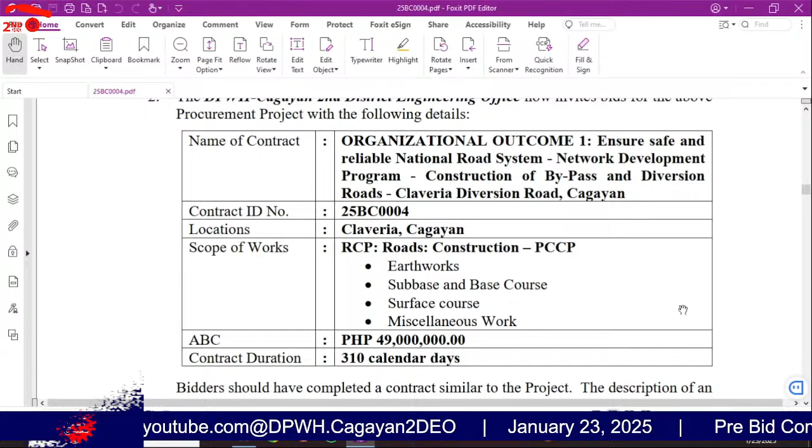So with this, may I request Engineer Figueres to discuss the details of this project. For the contract ID 25BC0004, contract name: Organizational Outcome 1, ensure safe and reliable national road system, network development program, construction of bypass and diversion roads, Claveria Diversion Road, Cagayan. Location of the contract is Claveria, Cagayan, with the approved budget of the contract at 49 million.

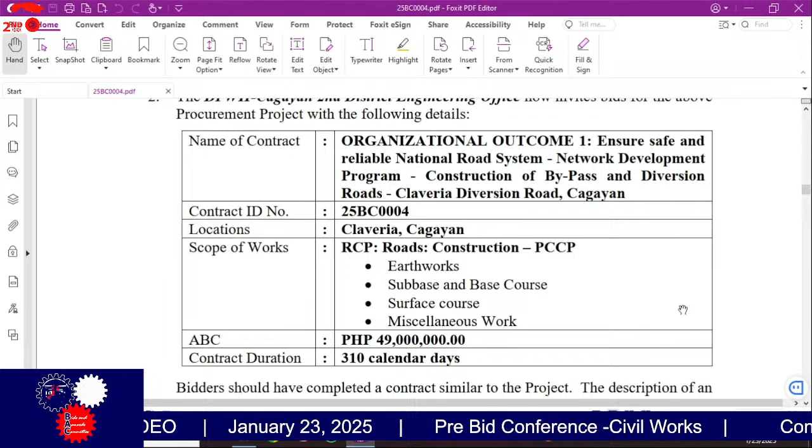For the major categories of work for the contract to be procured, we have RCP road construction, PCCP, with a target length of 3.23 lane kilometer. Contract duration of 310 calendar days.

For the description of work to be done, first is the facilities for the engineers, then other general requirements and earthworks, then sub-base and base course, surface course, and miscellaneous work. We also have the drainage and slope protection structures.

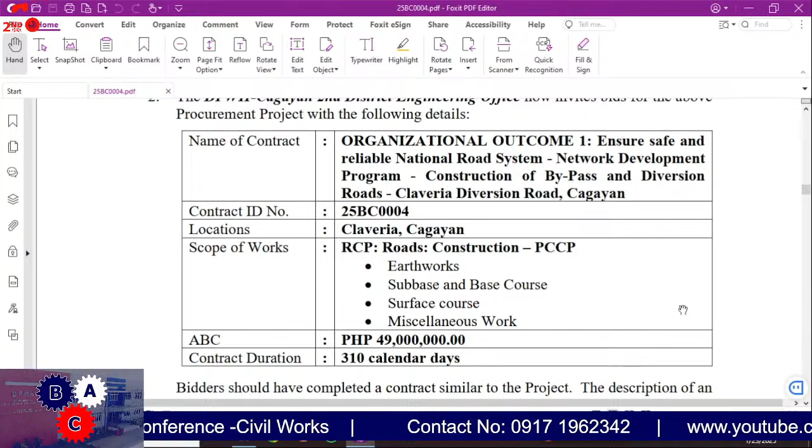For the minimum equipment requirement, we have: one payloader, LX280-2C, 110 HP, with a capacity of 1.5 cubic meter or 1.95 cubic yard; one water truck or pump, 360 horsepower with a capacity of 16,000 liters; one dump truck, 290 horsepower with a capacity of 12 cubic yard; one motorized road grader, G710A, 140 horsepower.

One sealer, one joint sealer, gas or diesel driven with hot or cold spray nozzle; one backhoe, 138 horsepower with a capacity of 0.8 cubic meter or 1.04 cubic yard; one plate compactor, 400 to 500, gasoline engine, 5 horsepower; one vibratory roller, 125 horsepower with a capacity of 10 metric tons; one transit mixer, 175 HP with a capacity of 5 to 6 cubic yard; one concrete vibrator, flexible shaft type, 2-inch head in diameter, with a 5 ampere gasoline-driven unit.

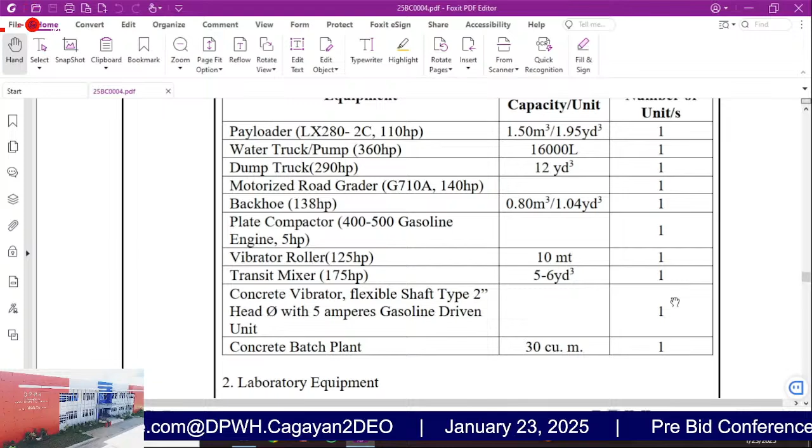One concrete batch plant with a capacity of 30 cubic meter. That's all, Mr. Chair.

Okay, any reaction or correction for this particular project? Okay. So, since there's no correction, may we now proceed to the next project.

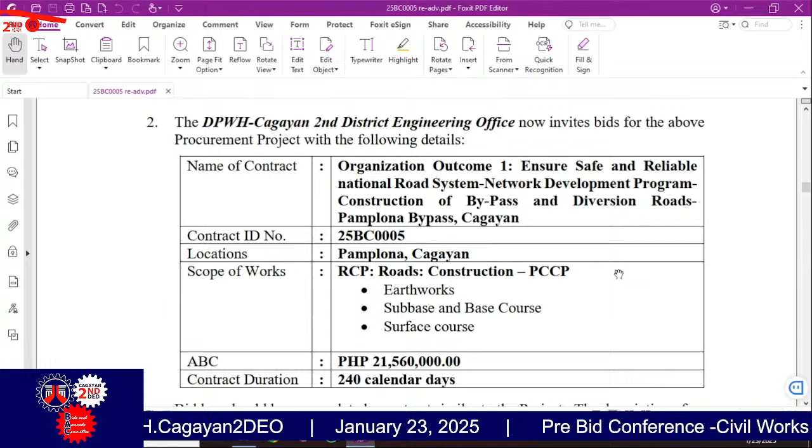The contract duration will be 240 calendar days. And for the scope of work includes earthworks, surface course, and base course, and retaining wall with RCPC.

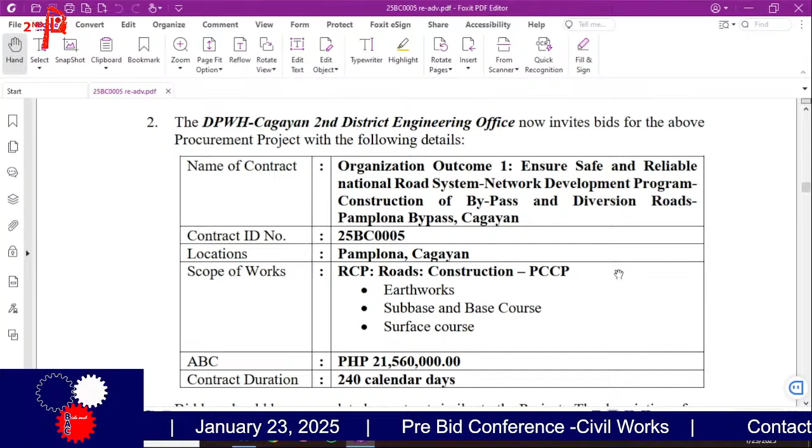The minimum equipment required for this project: 1 unit each of backhoe 138 horsepower, cargo or service truck of 270 horsepower, concrete screeder, concrete vibrator, dump truck, motorized road grader, payloader, transit mixer, vibratory roller, and water truck with pump, sir. That's all, sir.

Okay, by the way, why is it this project was re-advertised? What is the problem? Oh, wala, I don't see a problem here, sir. No, we already advertised this before. Yes, sir. So why re-advertise? What is the cause? Root cause?

Yeah, okay. Well, I thought there is a revision in the program of work or plans like that. So it's okay. So it's only because of the re-advertisement is the eligibility of the contractor.

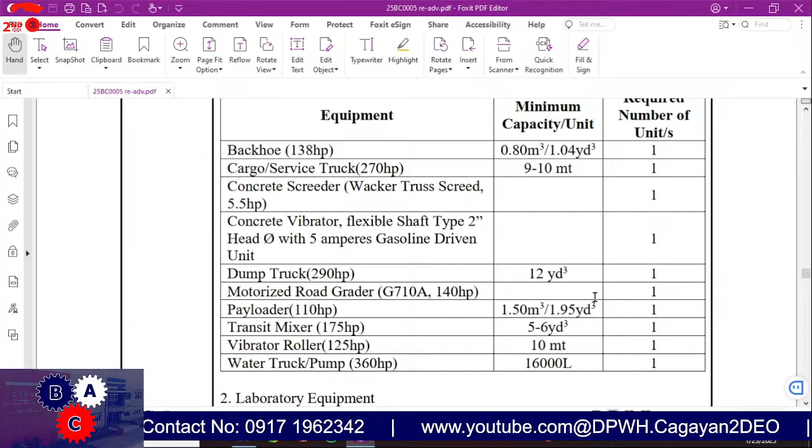Okay, next project, 25BC0009, organizational outcome 2, protect lives and properties against major floods, flood management program, construction and/or rehabilitation of flood mitigation facilities within major river basins and principal rivers, construction of Dugo flood control along Abulug River, Package 2, Barangay Dugo, Abulug, Cagayan.

Okay, Engineer Gulia, would you please read the details? Thank you, Mr. Chair. Good morning to everyone. For this contract, ID 25BC0009, the approved budget for the contract is...

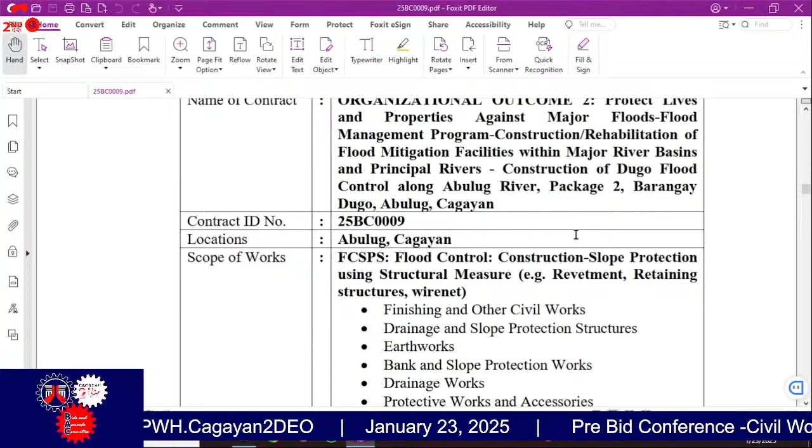96,500,000 pesos only. And the major categories of work for the contract to be procured: FCSPS, flood control, construction, slope protection using structural measures, revetment, retaining structures, wire net. It has a net length of 263 linear meters.

And the similar major categories of work: RCSPS, roads, construction, slope protection using structural measures, revetment, retaining structures, wire net, FHR, flood control, hydraulics, river control, PHC, ports, harbors, causeway, and FHD, flood control hydraulics dam. It has a total contract duration of 241 calendar days.

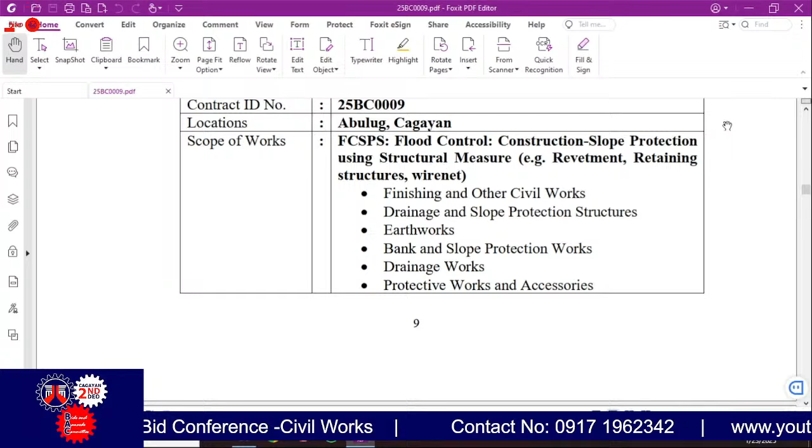And for the scope of works: painting works for the railings, steel sheet pile, structural concrete and reinforcing steel grade 40 for the concrete pile cap, structure excavation, pipe culverts and drainage excavation, gravel fill, concrete slope protection, concrete piles cast in drilled holes, permanent casing with a diameter of 0.8 meter, 10 mm thick.

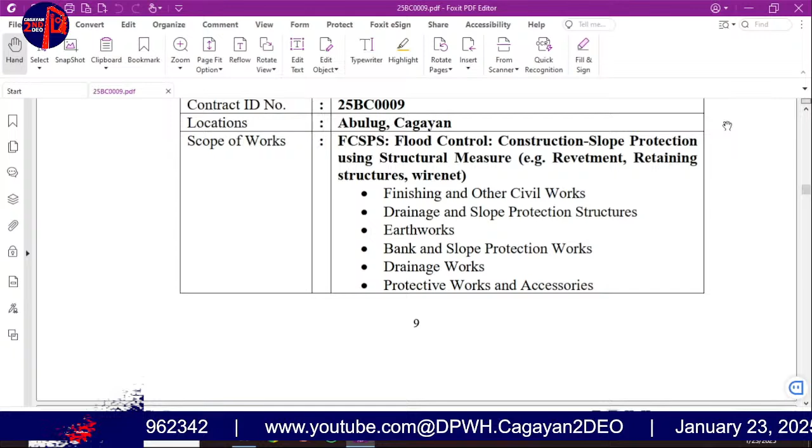Furnishing and driven of steel sheet pile Z-type grade 50, 910 millimeter diameter pipe culverts class 4, and provision of 882 pieces hexapod. And for the minimum equipment requirement...

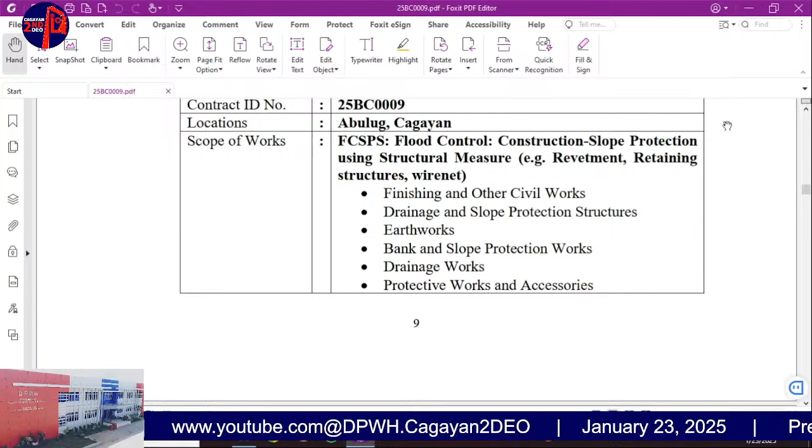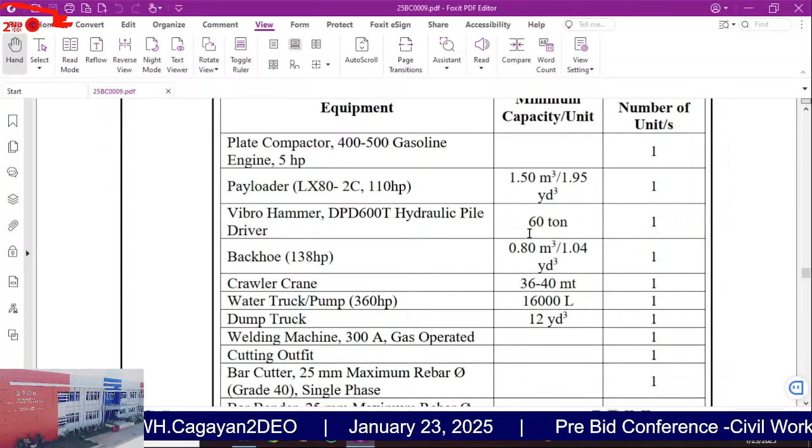Plate compactor, 5 horsepower, payloader with a capacity of 1.5 cubic meter or 1.95 cubic yards, vibro hammer with capacity of 60 tons, backhoe with capacity of 0.8 cubic meter or 1.04 cubic yards, crawler crane with capacity of 36 to 40 metric tons.

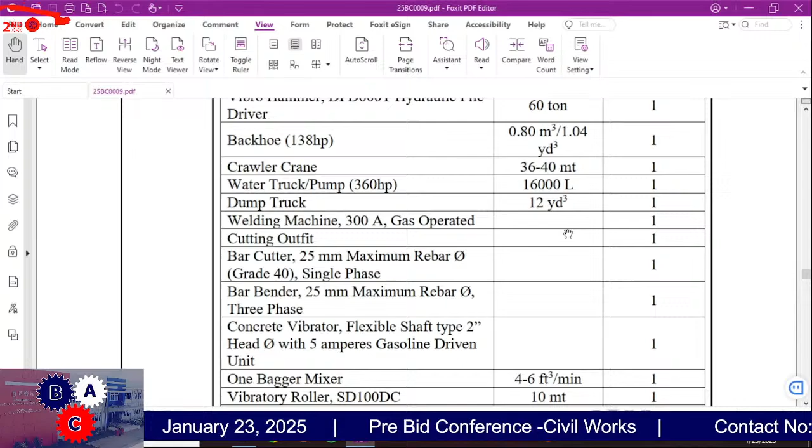Water truck 16,000 liters, dump truck 12 cubic yards, welding machine, cutting outfit, bar cutter 25 mm maximum rebar diameter, bar bender 25 mm maximum rebar diameter, concrete vibrator, 1 bagger mixer with capacity of 4 to 6 cubic feet, vibratory roller with a capacity of 10 metric tons, motorized road grader, and transit mixer with a capacity of 5 to 6 cubic yards.

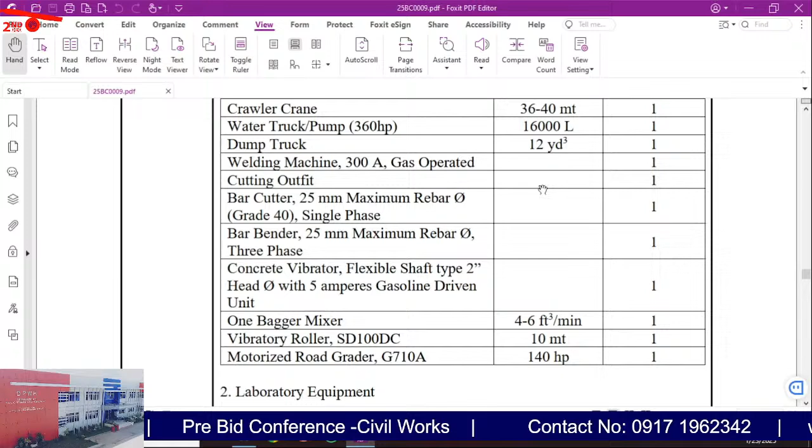That's all, Mr. Chair. Okay, any additional observations or corrections from the said items of work? Since none, so let's proceed to the next project.

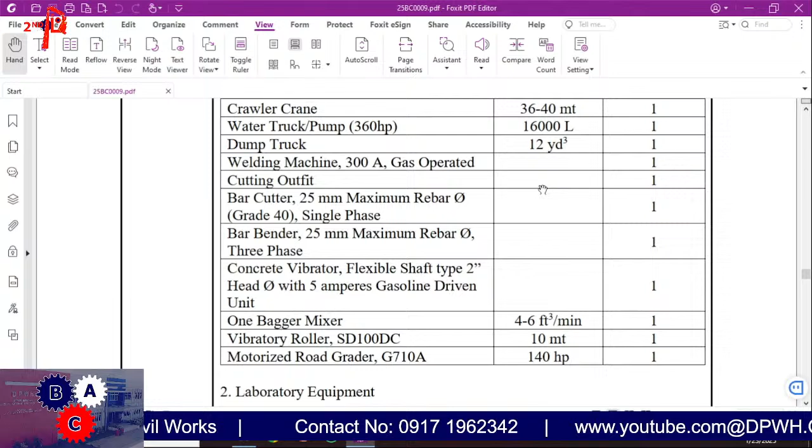One, two, three. 25 BC 0015. Organizational outcome 2, protect lives and properties against major floods, flood management program, construction and/or rehabilitation of flood mitigation facilities within major river basins and principal rivers, construction of Dugo flood control structure along Abulug River, Barangay Dugo, Abulug, Cagayan.

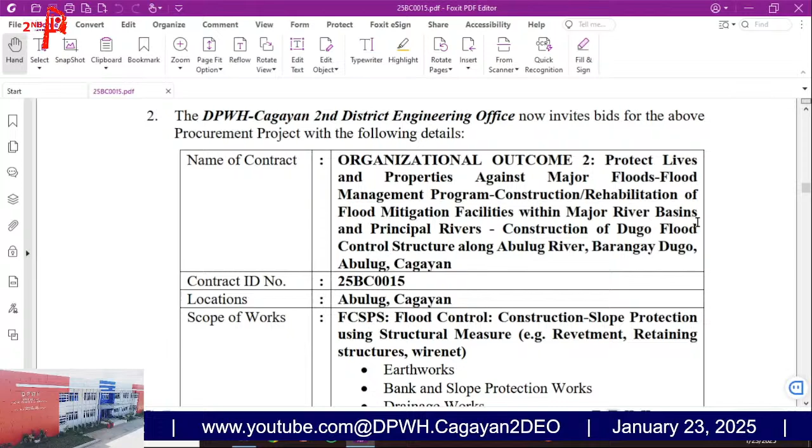Mr. Chair, next contract 25 BC 0015, the contract name organizational outcome 2, protect lives and properties against major floods, flood management program, construction rehabilitation of flood mitigation facilities within major river basins and principal rivers, construction of Dugo flood control structure along Abulug River, Barangay Dugo, Abulug, Cagayan. Location of the project is Abulug, Cagayan.

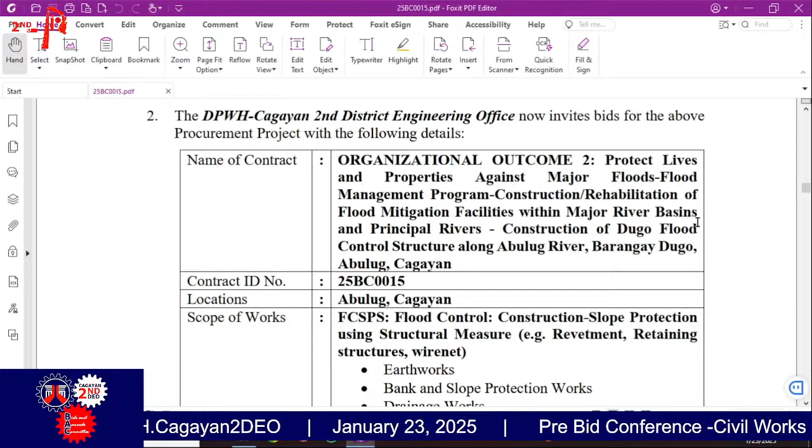Mr. Chair, the approved budget for the contract is 96,500,000. Major categories of work for the contract to be procured: FCSPS, flood control, construction of slope protection using structural measures, revetment, retaining structures, wire net. The total length of the project is 277 linear meters.

Similar major categories of work: RCSPS, roads, construction, slope protection using structural measures, FHR, flood control, hydraulics, river control, PHC, ports, harbors, causeway, FHD, flood control, hydraulics dam.

Kailan ang bidding? Bidding? The contract has a 241 calendar days of duration.

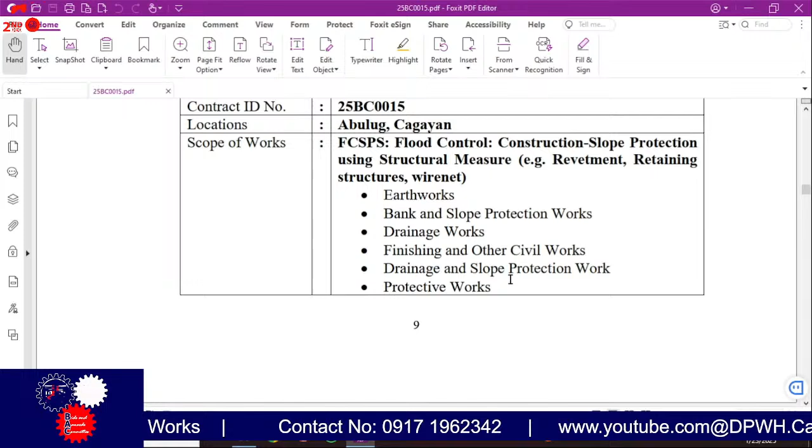Scope of works: provision of 4x4 pickup type service vehicle for the engineer on bare rental basis, construction of greenway, clearing and grubbing, structure excavation, pipe culverts and drain excavation, gravel fill, concrete slope protection, concrete piles cast in drilled holes with a diameter of 0.80 meters, permanent casing, diameter of 0.80 meters and 10 millimeter thick, furnished and driven of steel sheet pile, Z-type, grade 50, pipe culverts, 910 millimeter diameter, class 4.

Painting works for the steel, reinforcing steel grade 40, structural concrete, 20.68 megapascal, class A, 28 days, and hexapods.

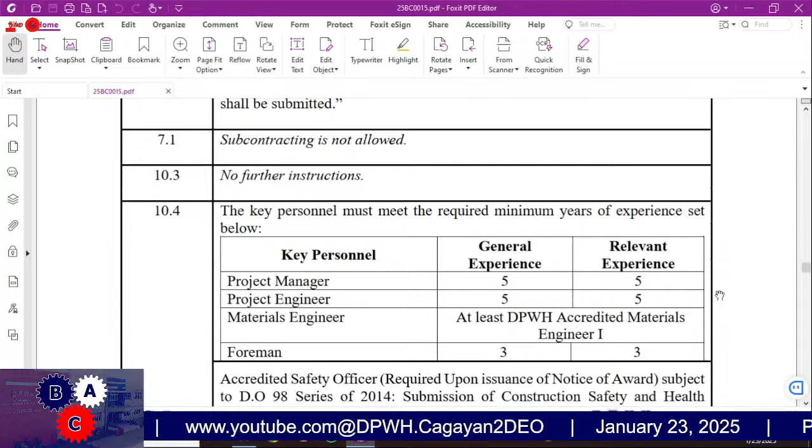Sir Chair, the minimum equipment requirement: 1 bagger mixer, 4 to 6 cubic feet; 1 concrete vibrator; 1 water truck, 360 horsepower, capacity of 16,000 liters; 1 cargo service truck, 270 horsepower, 9 to 10 metric tons capacity.

1 plate compactor, gasoline engine, 5 horsepower; 1 dump truck with capacity of 12 cubic yards; 1 backhoe, with capacity of 0.80 cubic meter or 1.04 cubic yard; 1 payloader, 110 horsepower with capacity of 1.5 cubic meter.

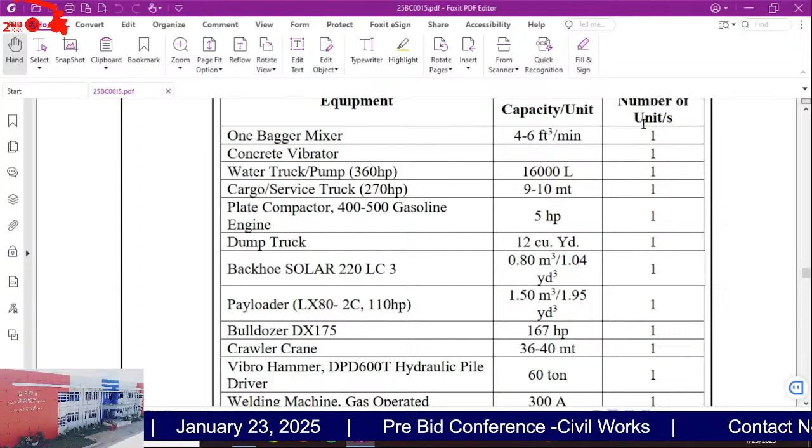1 bulldozer with capacity of 167 horsepower; 1 crawler crane, 36 to 40 metric ton capacity; 1 vibro hammer, hydraulic pile driver, 60 ton capacity; 1 welding machine, gas operated, 300 amperes capacity; 1 cutting outfit; 1 motorized grader, 140 horsepower capacity; 1 vibratory roller, 10 metric tons capacity; 1 transit mixer, 5 to 6 cubic yard capacity.

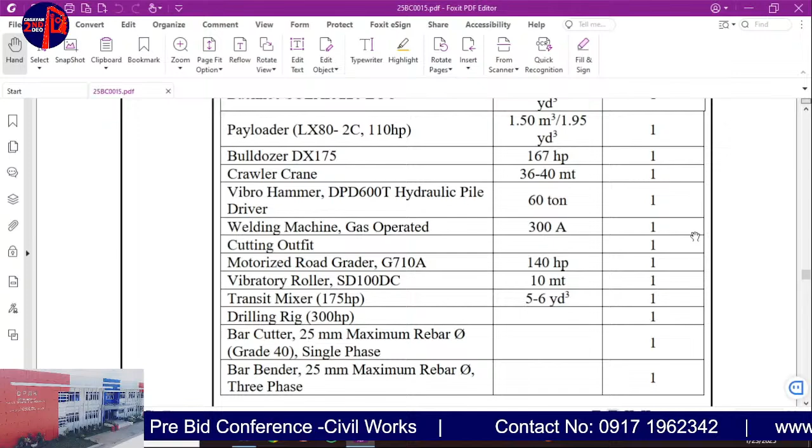1 drilling rig, 300 horsepower; 1 bar cutter with 25 millimeter maximum rebar, single phase; 1 bar bender, 25 millimeter maximum rebar, 3 phase. That's all, Mr. Chair.

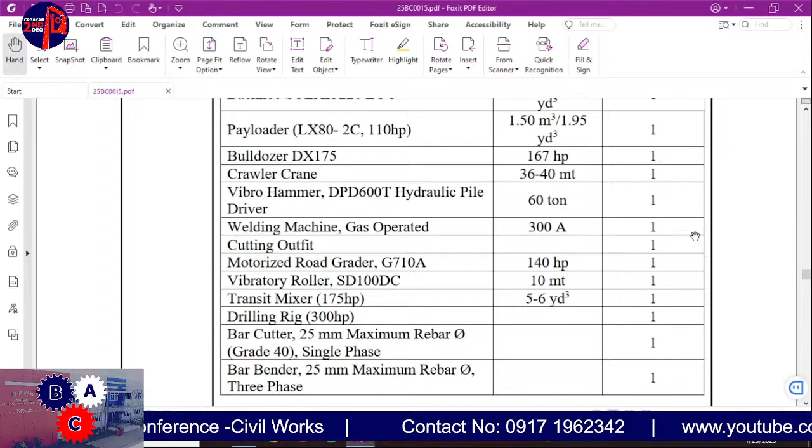Okay na? Okay na, sir. Okay, so let's proceed to the next project.

25BC0023, Organizational Outcome 2: Protect lives and properties against major floods, flood management program, construction and maintenance of flood mitigation structures and drainage systems, construction of Alannay flood control structure along Zinundungan River, Lasam, Cagayan.

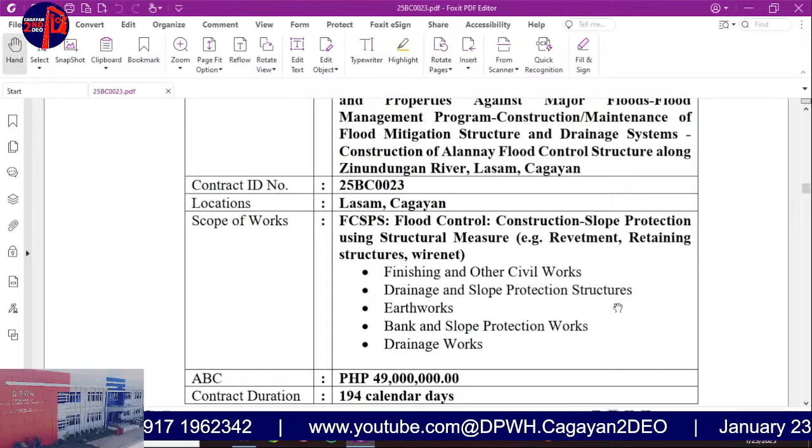Okay, Engineer Guillermo.

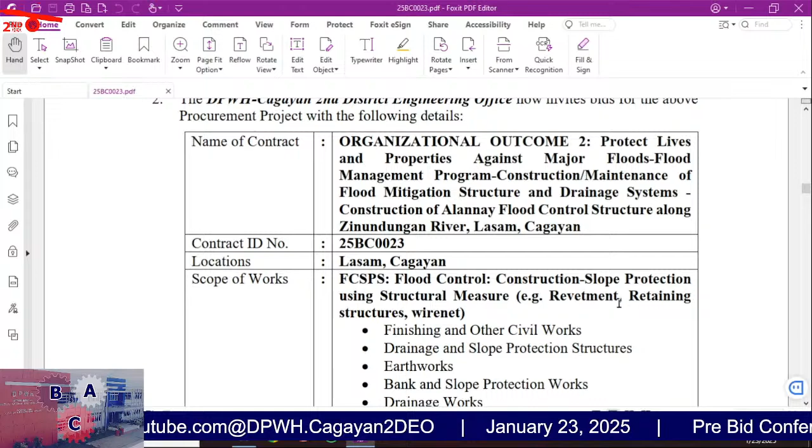For 25BC0023, Organizational Outcome 2, Protect Lives and Properties Against Major Floods, Flood Management Program, Construction and Maintenance of Flood Mitigation Structures and Drainage System, Construction of Alannay Flood Control Structure along Zinundungan River located at Lasam, Cagayan. The approved budget for the contract is 49 million pesos.

Major categories of work for the contract to be procured: FCSPS, flood control, construction slope protection using structural measures, revetment, retaining structures, and wire net. Target length will be 284 linear meters. The contract duration will be 194 calendar days.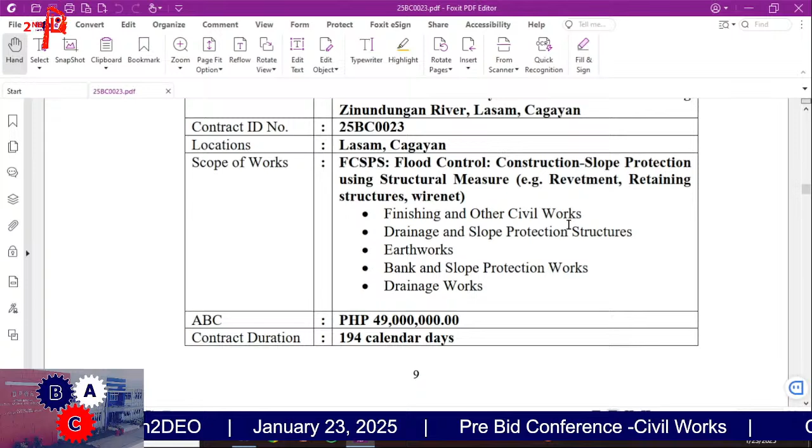And the scope of works, finishing and other civil works include painting works of steel sheet pile, drainage and slope protection, earthworks, bank and slope protection. Under bank and slope protection will be concrete slope protection, furnished and driven steel sheet piles, Z-type grade 50, gabions, and lastly drainage works, which will be RCPC and line canal.

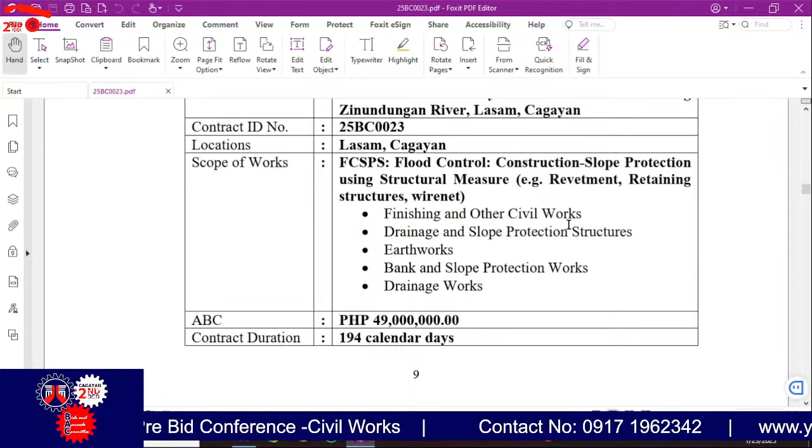Minimum equipment requirement, one unit each: transit low bed, payloader, vibratory roller, backhoe, transit mixer, water truck with pump, dump truck, motorized road grader, bar cutter, bar bender, cargo service truck, one bagger mixer, concrete vibrator, and crawler crane.

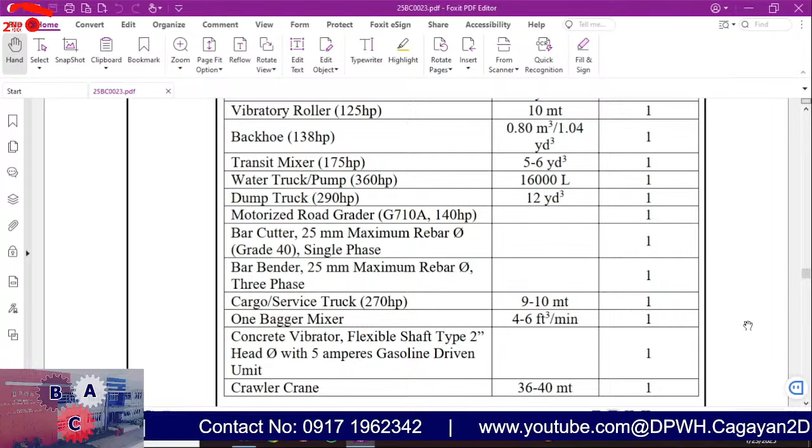Plate compactor, vibro hammer, welding machine, and cutting outfit. That's all, Mr. Chair. Okay, thank you.

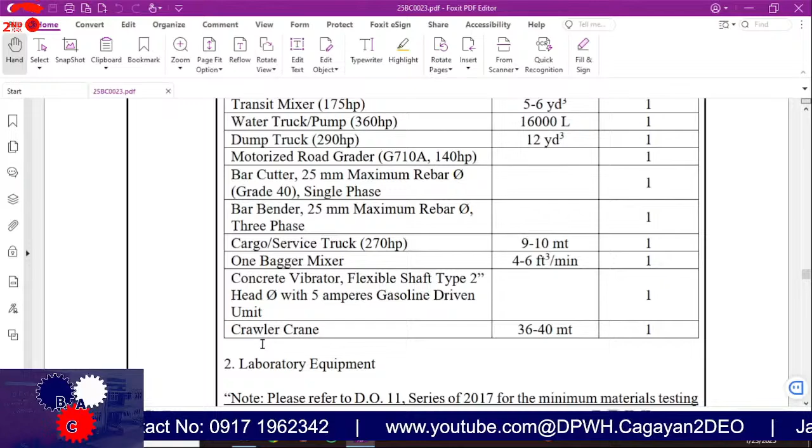So let's proceed to the next project, 25BC0038. This is a re-advertised project. Convergence and Special Support Program, construction and improvement of access roads leading to trades, industries, and economic zones.

Roads Leveraging Linkages for Industry and Trade Infrastructure Program, ROLL-IT. San Pedro Magsaysay, Cabatacan West, Barangay Road, to Junction Logac, Lasam Gagabutan Road, connecting to banana, coconut, and cacao plantation and processing, located at Lasam, Cagayan.

Okay? Rebecca? Thank you, Mr. Chair. Good morning to everybody.

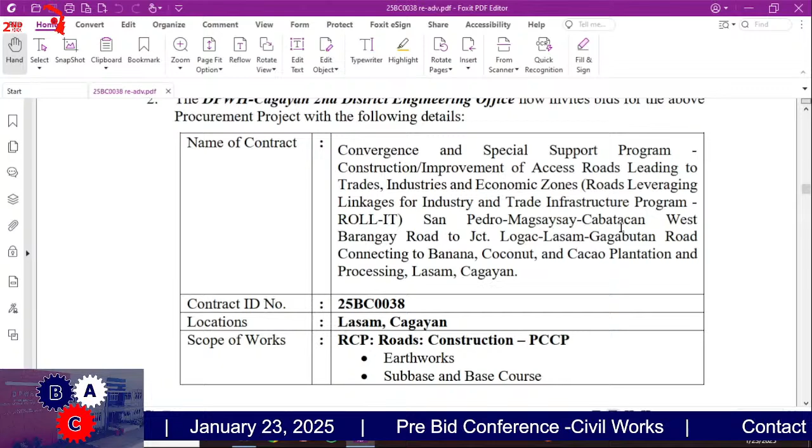Next project is with the contract ID of 25BC0038, with the contract name of Convergence and Special Support Program, construction improvement of access roads leading to trades, industries, and economic zones, Roads Leveraging Linkages for Industry and Trade Infrastructure Program, or ROLL-IT. San Pedro, Magsaysay, Cabatacan West, Barangay Road to Junction, Logac, Lasam, Gagabutan Road, connecting to banana, coconut, and cacao plantation and processing at Lasam, Cagayan.

The approved budget for the contract is 12,348,000 pesos only. The major categories of work for the contract to be procured is RCP, Roads Construction, PCCP. This project has a length of 404 meters.

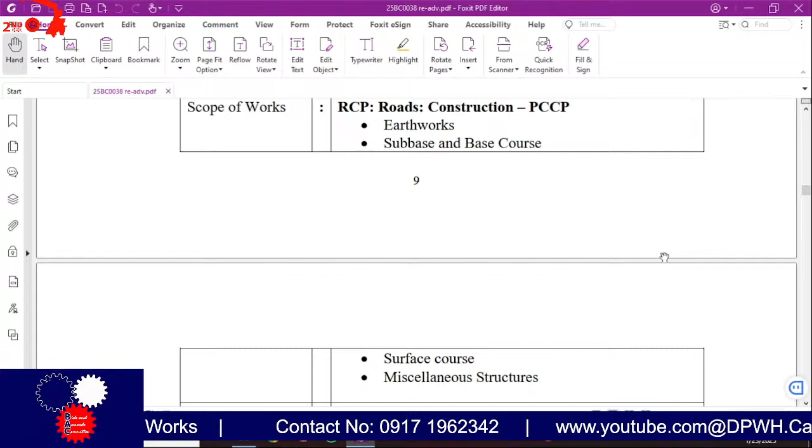The scope of works for this project is clearing and grubbing, individual removal of trees, embankment from roadway, embankment from borrow, subgrade preparation, aggregate sub-base course, gravel surface course, PCCP with 0.15 meter thick, PCCP with thickness of 0.28 meter, furnishing and transplanting of trees, removal of actual structures, structure excavation, foundation fill, pipe culverts, and drain excavation.

And the total contract duration for this contract, Mr. Chair, is 149 calendar days.

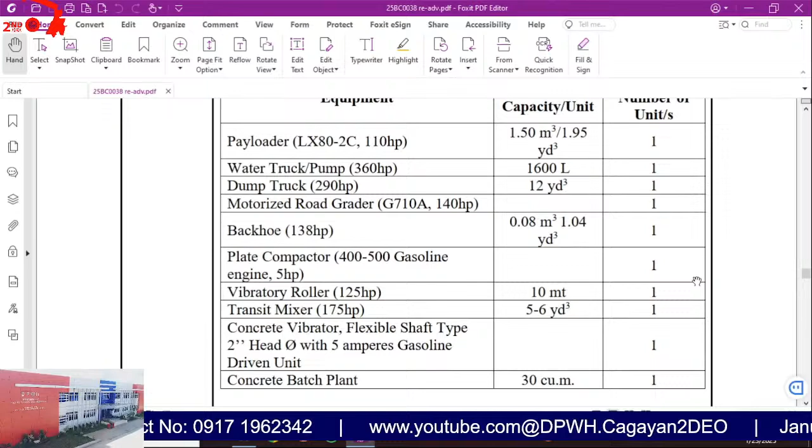The minimum equipment requirement for this project is one payloader, one water truck, one dump truck, one motorized road grader, one backhoe, one plate compactor, one vibratory roller, one transit mixer, one concrete vibrator, flexible shaft type, and one concrete batch plant. That's all, Mr. Chair.

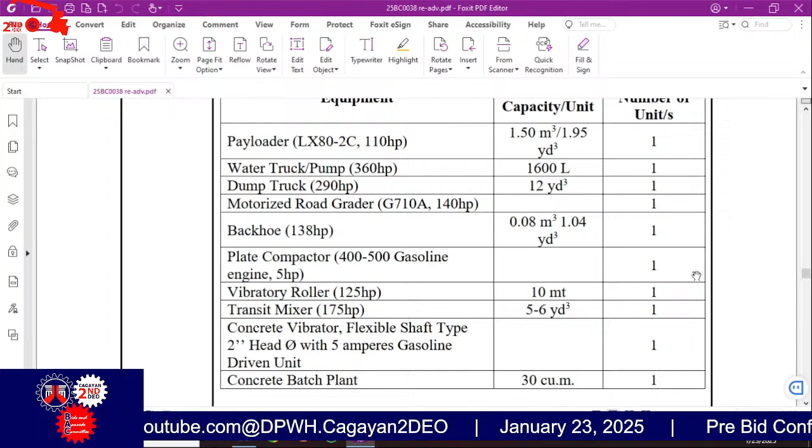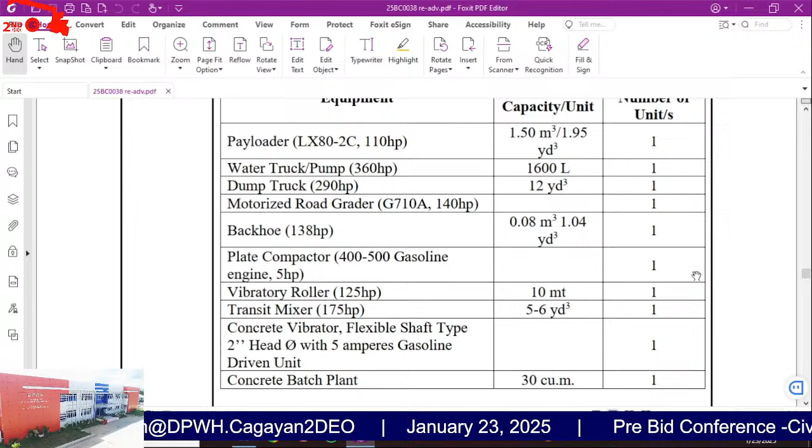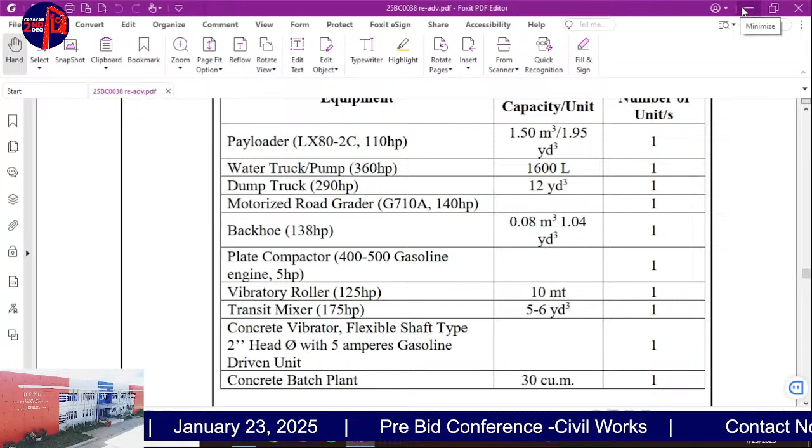Okay, next project. Mr. Chair, for the information of everybody, the encoded capacity of water truck from the bidding documents is 1,600 liters. It should be 16,000 liters. That was a problem with our previous contractors, so please check. Correct that to avoid a bid bulletin, so that it will be ready for the bid on February 4. So no more correction. Okay, let's proceed to the next.

25BC0045, Convergence and Special Support Program, construction improvement of access roads leading to trades, industries, and economic zones. Roads Leveraging Linkages for Industry and Trade Infrastructure Program, ROLL-IT. Access road leading to Palusao-Niug, in support of vegetable and crops industry, Santo Niño, Cagayan. We will discuss this.

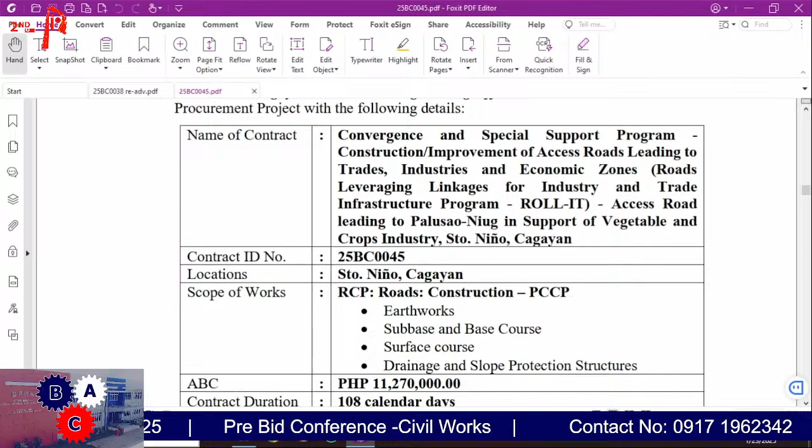Earthworks, sub-base and base course, surface course, PCCP or Portland Cement Concrete Pavement unreinforced, 0.28 meter thick for the carriageway and 0.15 meter thick for the shoulder. Also included, reinforcing steel grade 40 and structural concrete 20.68 megapascals for the retaining wall and head wall.

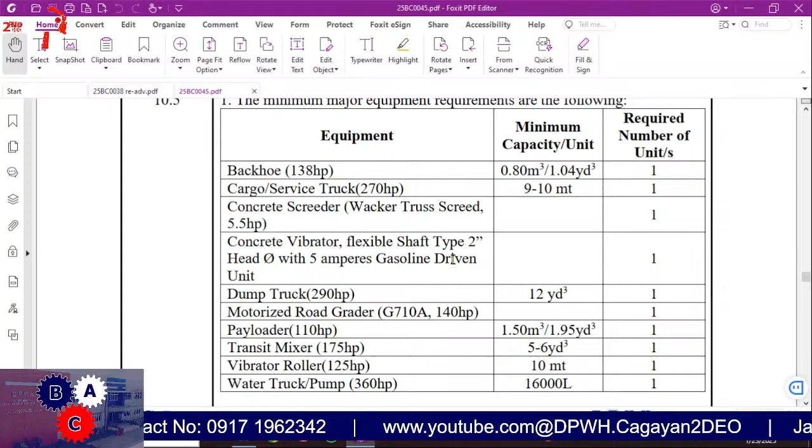And for the minimum equipment requirement: backhoe with the capacity of 0.8 cubic meter or 1.04 cubic yards, cargo or service truck, 9 to 10 metric tons, concrete screeder, concrete vibrator, dump truck with the capacity of 12 cubic yards, motorized road grader, payloader with the capacity of 1.5 cubic meters or 1.95 cubic yards, transit mixer with the capacity of 5 to 6 cubic yards, vibratory roller with the capacity of 10 metric tons, and water truck with the capacity of 16,000 liters.

That's all, Mr. Chair.

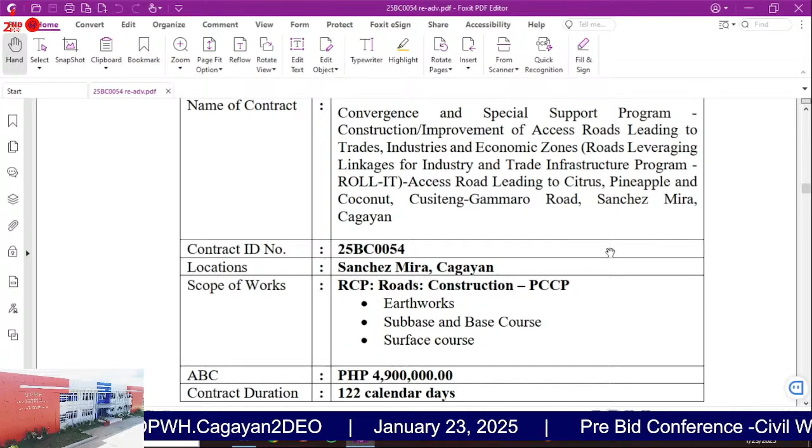Mr. Chair, for the contract ID 25BC0054 with contract name Convergence and Special Support Program, construction improvement of access roads leading to trades, industries, and economic zones. Roads leveraging linkages for industry and trade infrastructure program, roll it. Access road leading to citrus, pineapple, and coconut, Cusiteng-Gammaro Road, Bangan, Sanchez Mira, Cagayan.

The contract has an approved budget of 4,900,000. Major categories of work for the contract to be procured are roads, construction, PCCP. With a net length of 0.107 kilometer or 0.214 lane kilometer.

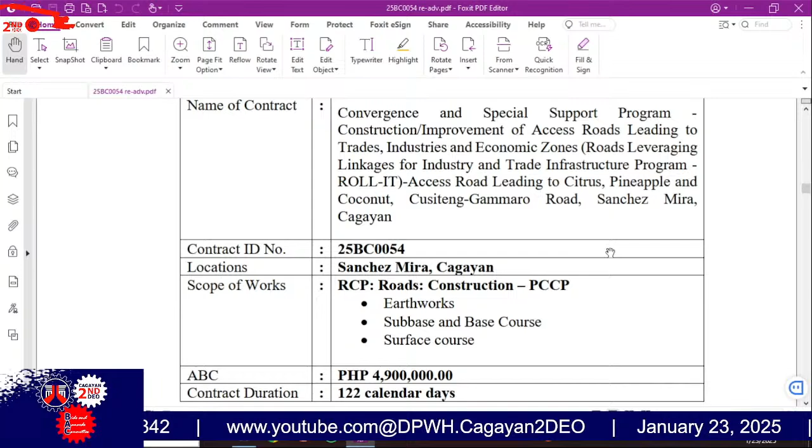Scope of work: clearing and grubbing, removal of actual structures, obstruction, 610 millimeter diameter RCPC, embankment, embankment from borrow, aggregate sub-base course, Portland cement concrete pavement unreinforced 0.15 meter thick, Portland cement concrete pavement unreinforced 0.28 meter thick, structure excavation, foundation fill, pipe culverts and drain excavation, reinforcing steel grade 40, structural concrete 20.68 megapascal class A, and pipe culverts 910 millimeter diameter.

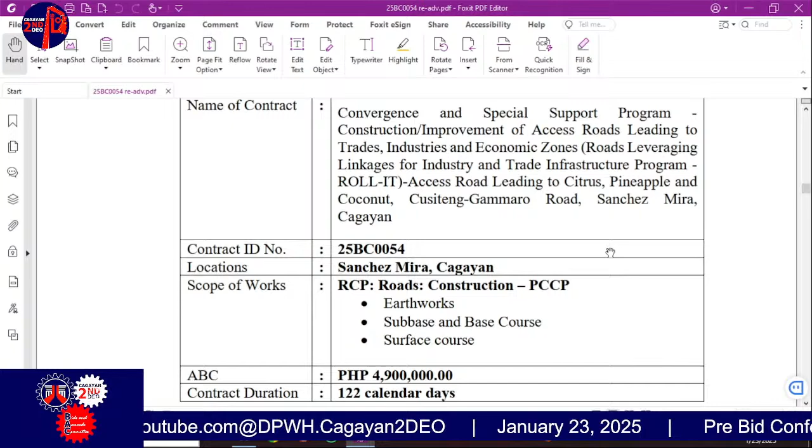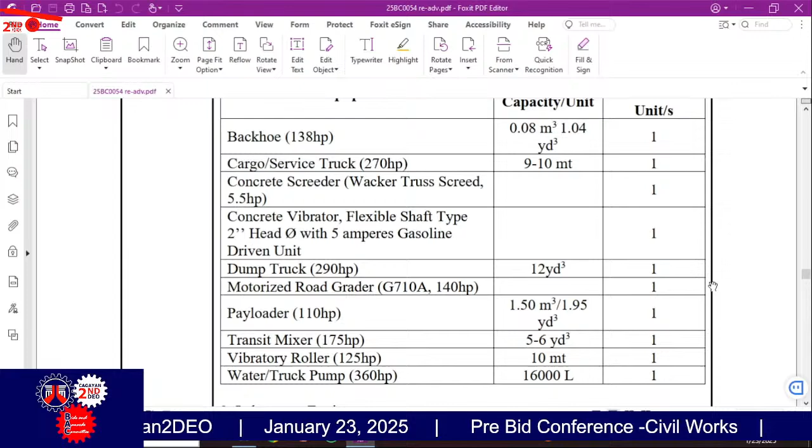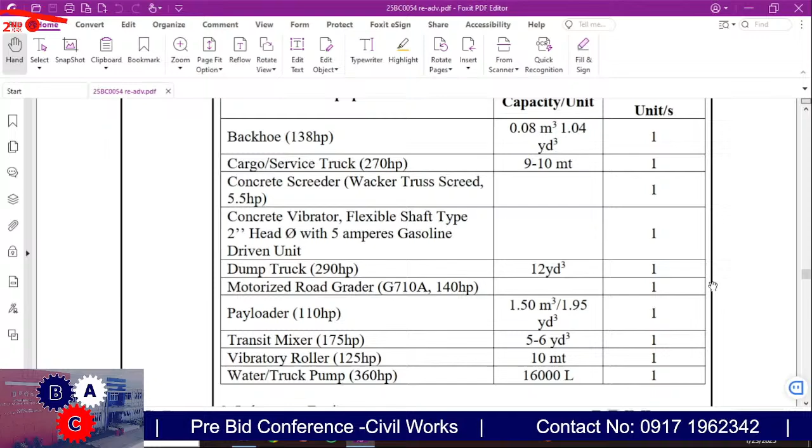For the minimum equipment requirement: one backhoe, 138 horsepower with capacity of 0.08 cubic meter, one cargo service truck, 270 horsepower with capacity of 9 to 10 metric tons, one concrete screeder with 5.5 horsepower, one concrete vibrator, gasoline-driven unit, one dump truck, 290 horsepower with capacity of 12 cubic yards, one motorized grader with 140 horsepower, one payloader with capacity of 1.5 cubic meter or 1.95 cubic yard, one transit mixer, 175 horsepower with capacity of 5 to 6 cubic yard, one vibratory roller, 125 horsepower with capacity of 10 metric tons, one water truck with a capacity of 16,000 liters, and one sealer joint, gas or diesel driven.

That's all, Mr. Chair.

Leading to trades, industries, and economic zones. Roads leveraging linkages for industry and trade infrastructure program, ROLL-IT. Santa Filomena, Langay, Barangay Road, leading to Junction, Ayaga, in support of agribusiness, Banguian and Santa Filomena, Abulug, Cagayan.

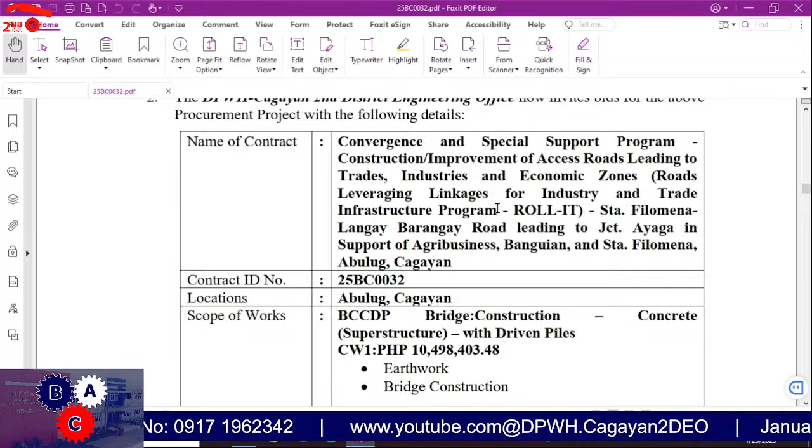We will discuss this.

Okay, thank you, Mr. Chair. For contract ID number 25BC0032, Convergence and Special Support Program, construction, improvement of access roads, leading to trades, industries, and economic zones. ROLL-IT, Santa Filomena, Langay, Barangay Road, leading to Junction, Ayaga, in support of agribusiness, Banguian and Santa Filomena, Abulug, Cagayan.

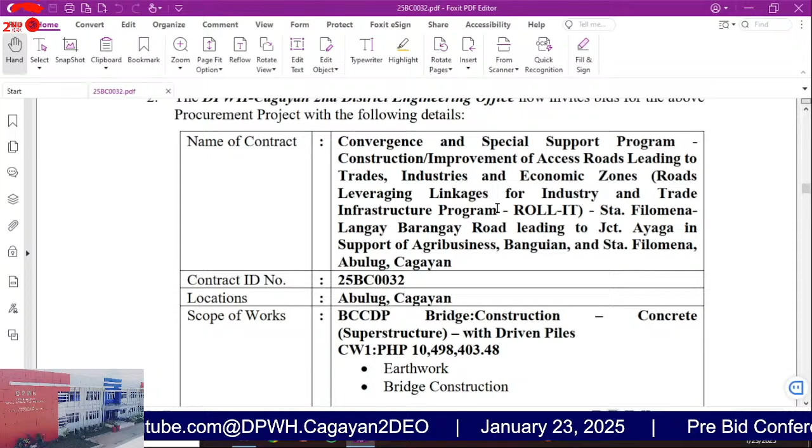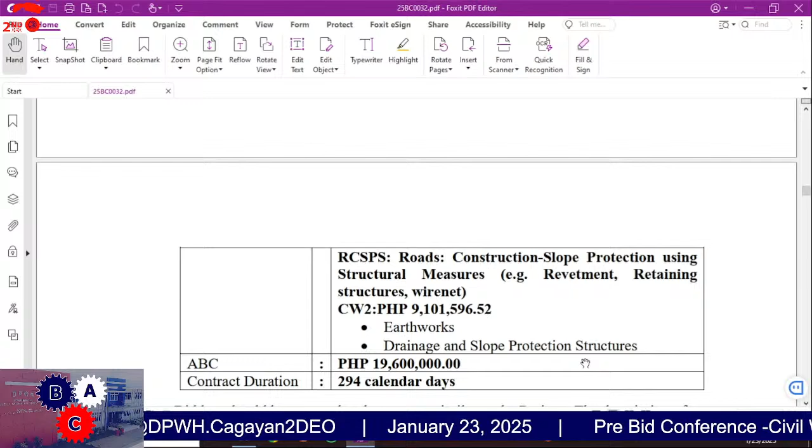The approved budget for the contract is 19,600,000 pesos only. For the major categories of work for the contract to be procured: bridge construction, concrete superstructure with driven piles. For the similar major categories of work: bridge rehabilitation, concrete structure with driven piles. Bridge retrofitting, concrete superstructure with driven piles.

The project length is 12.8 linear meter. For the scope of work to be done, we have two civil works, 1 and 2.

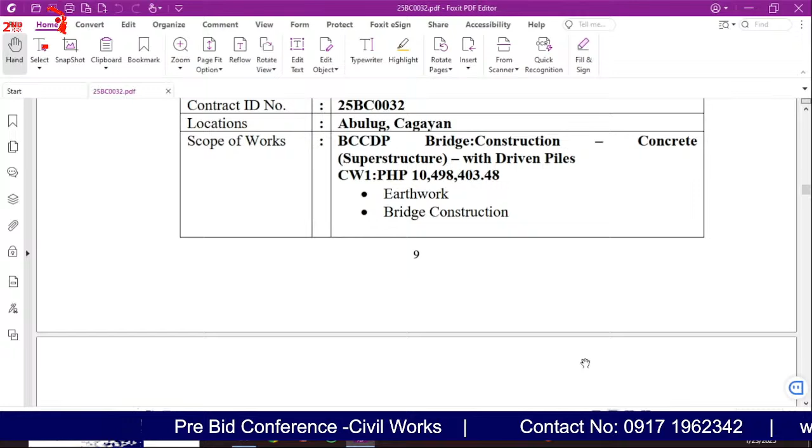For the civil works 1, Part C, the earthworks, removal of structures and obstruction, concrete, embankment from borrow, common soil. For Part F, bridge construction, includes precast concrete piles, furnish, precast concrete piles driven, pile shoes, concrete railing standard, reinforcing steel grade 40, reinforcing steel grade 60, structural concrete 20.68 megapascal class A 28 days.

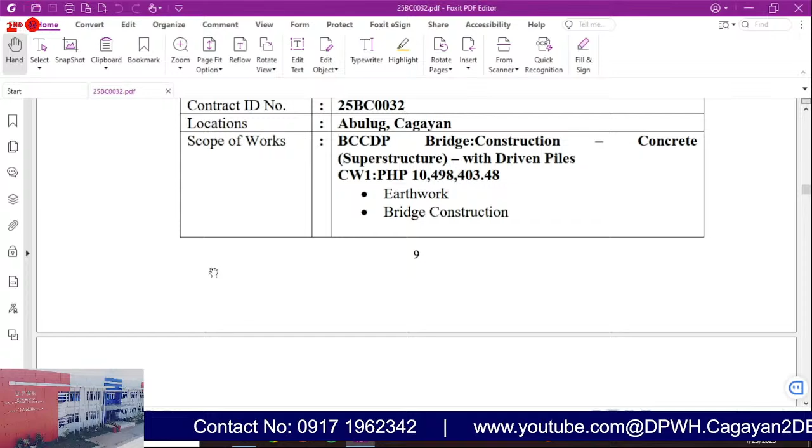Structural concrete 27.58 megapascal class A 28 days. Lean concrete class B 16.5 megapascal. Paint, concrete slope protection, and drain pipe galvanized.

For civil works 2, that includes earthworks and that comprises structure excavation, common soil, and foundation fill. Part G, the drainage and slope protection structures, that includes reinforcing steel grade 40, structural concrete 20.68 megapascal class A 28 days, and pipe culverts 910 mm diameter class 4 RCPC.

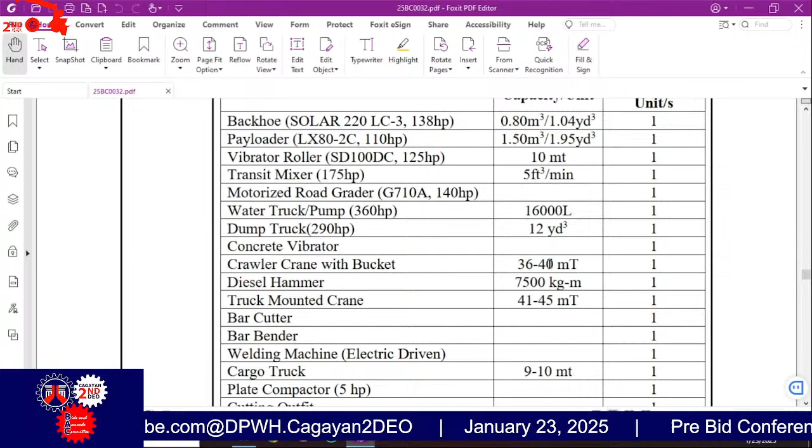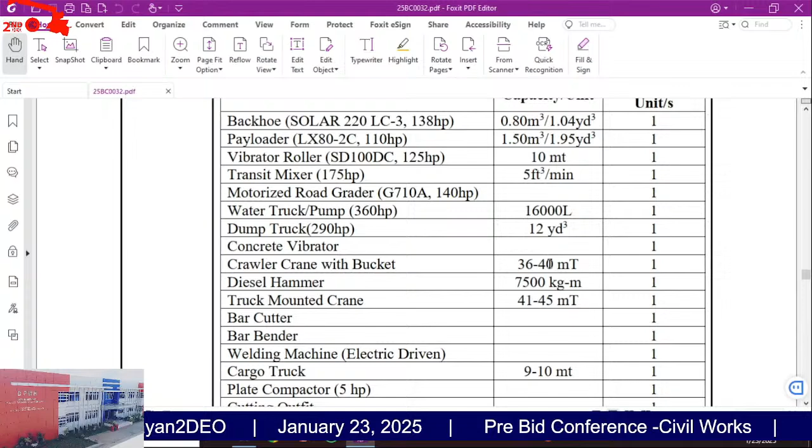For the minimum equipment requirement, we have one backhoe with a capacity of 0.80 cubic meter, one payloader with a capacity of 1.5 cubic meter, one vibratory roller with a capacity of 10 metric tons, one transit mixer with a capacity of 5 cubic feet, one motorized road grader, one water pump with a capacity, water truck or pump with a capacity of 16,000 liters, one dump truck with a capacity of 12 cubic yards, one concrete vibrator,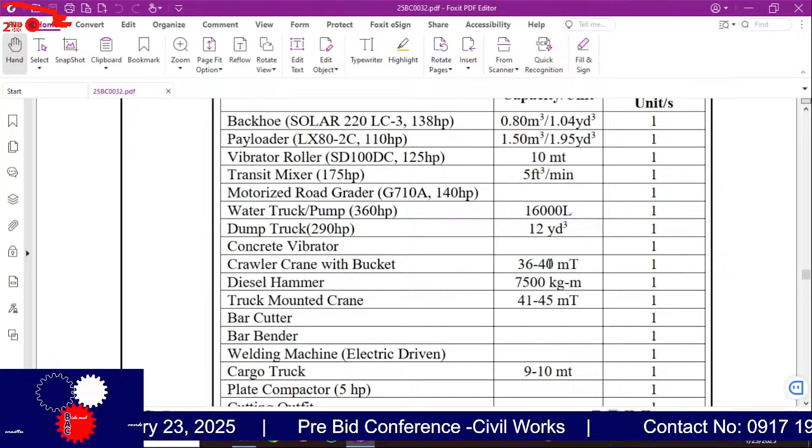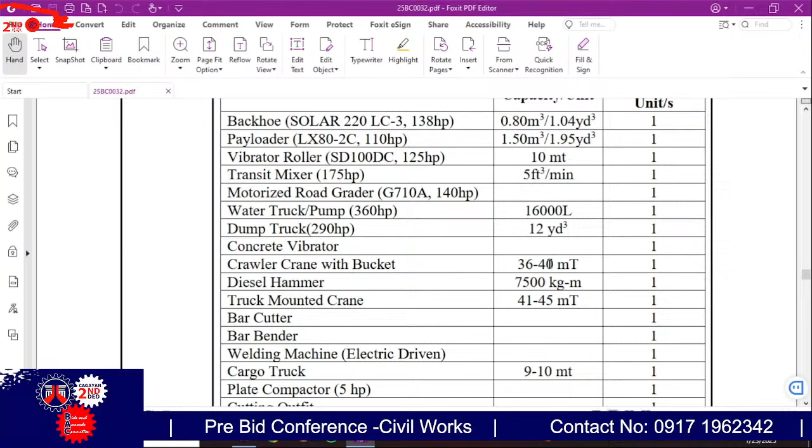one crawler crane with bucket with a capacity of 36 to 40 metric tons, one diesel hammer with a capacity of 7,500 kilogram meter, one truck-mounted crane with a capacity of 41 to 45 metric tons, one bar cutter, one bar bender, one welding machine, electric driven, one cargo truck with a capacity of 9 to 10 metric tons, one plate compactor, 5 horsepower, one cutting outfit, one air compressor, and one drop hammer.

The contract duration of this project is 294 calendar days. That's all, Mr. Chair.

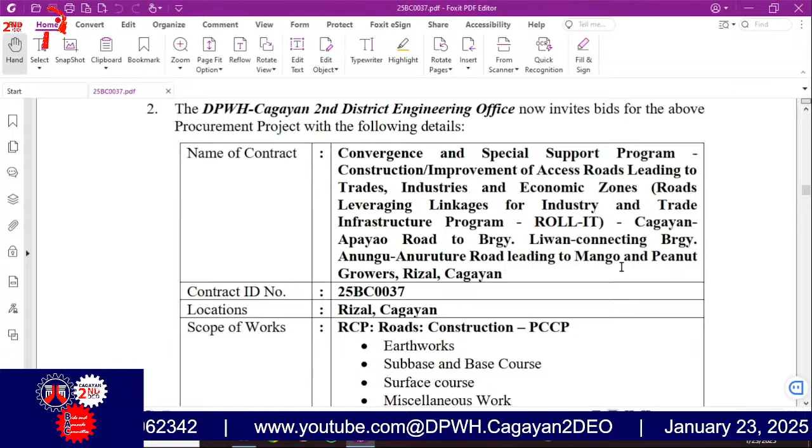The last project has the contract ID of 25BC0037, with the contract name of Convergence and Special Support Program, construction improvement of access roads leading to trades, industries, and economic zone, ROLL-IT, Cagayan-Apayao Road to Barangay Liwan, connecting Barangay Anungu, Anuruture Road, leading to Mango and Peanut Growers, Rizal, Cagayan.

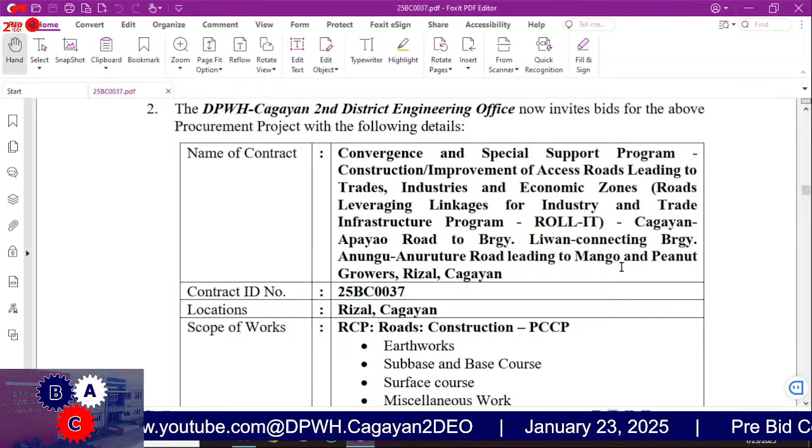The approved budget for the contract is 4,410,000 pesos. The major categories of work for the contract to be procured is RCP, Roads Construction, PCCP, and it has a length of 225 meters.

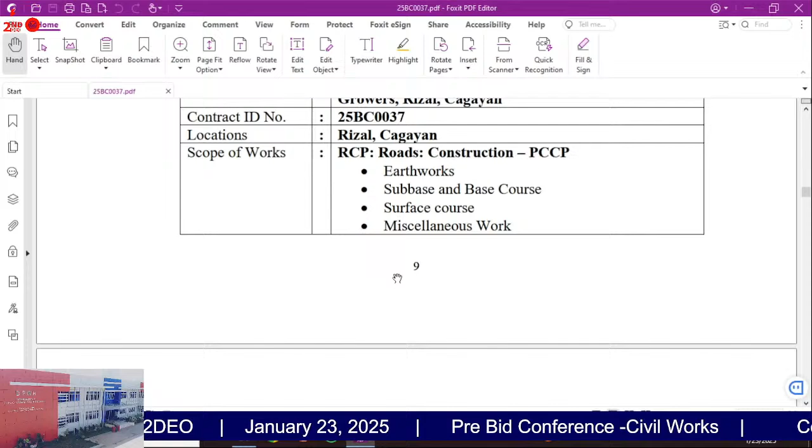The scope of works for this contract is surplus common excavation, structure excavation, foundation fill, pipe culverts and drain excavation, embankment from roadway structure excavation, subgrade preparation, aggregate sub-base course, gravel surface course, PCCP with a thickness of 0.15 meter and 0.28 meter. The reinforcing is steel grade 40. The drainage structural concrete includes pipe culverts with a diameter of 910 mm, catch basin with a diameter of 910 mm, and curb and gutter precast.

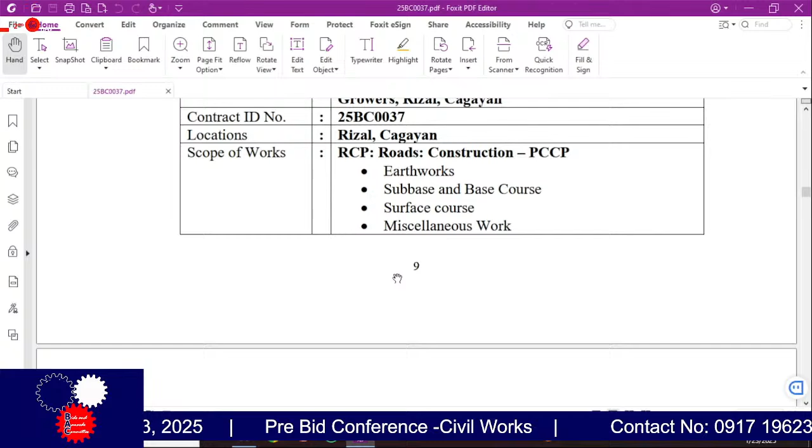The total contract duration for this contract, Mr. Chair, is 65 calendar days.

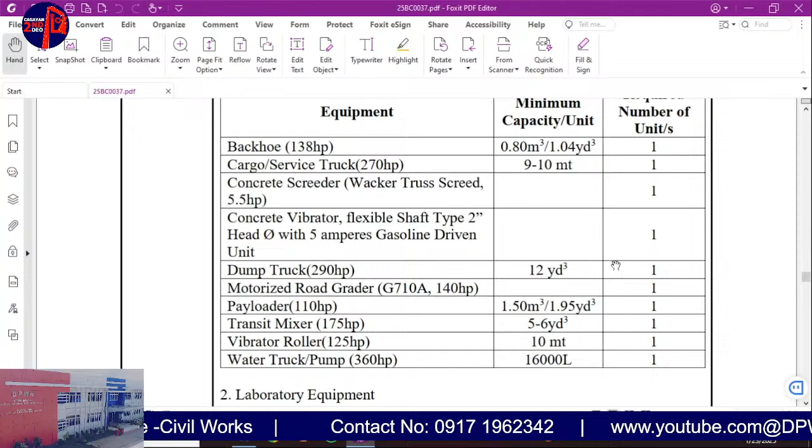The minimum equipment requirement for this contract is 1 backhoe with a capacity of 0.8 cubic meter, 1 cargo service truck with a capacity of 9 to 10 metric tons, 1 concrete screeder, 1 concrete vibrator, 1 dump truck with a capacity of 12 cubic yard, 1 motorized road grader, 1 payloader with a capacity of 1.5 cubic meter, 1 transit mixer with a capacity of 5 to 6 cubic yard, 1 vibratory roller, and 1 water truck with a capacity of 16,000 liters.

That's all, Mr. Chair.

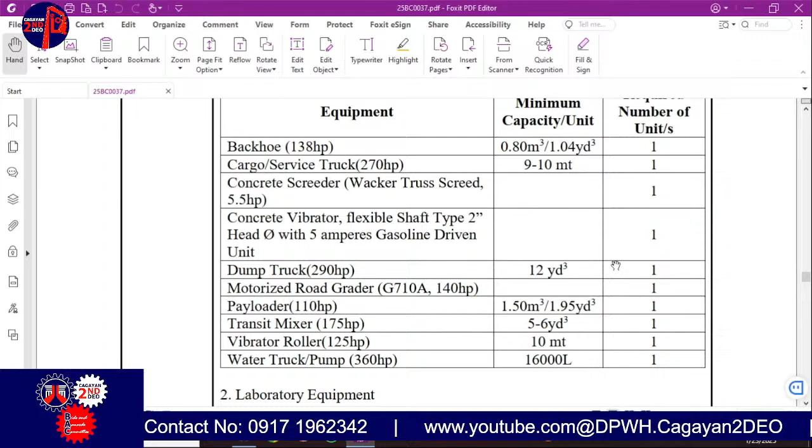Okay, thank you. So that ends our pre-bid conference for the 10 projects. So to all viewers, especially the contractors, please be reminded on the required equipment so that you will not be disqualified.

So any other matters to discuss from the head of the secretariat?

Mr. Chair, may I just read the checklist of the technical and financial documents required to be submitted by the interested bidders? For the technical component envelope, we have the legal documents, which is the valid PhilGEPS registration certificate, platinum membership, and all pages in accordance with Section 8.5.2 of the IRR.

And technical documents: statement of the prospective bidder of all its ongoing government and private contracts, including contracts awarded but not yet started, and statement of the bidder's single largest completed contract, or the SLCC, similar to the contract to be bid.

And special power of attorney in case of joint ventures, original copy of bid security, original duly signed omnibus sworn statement, and the original notarized secretary's certificate in case of a corporation, partnership, or cooperative.